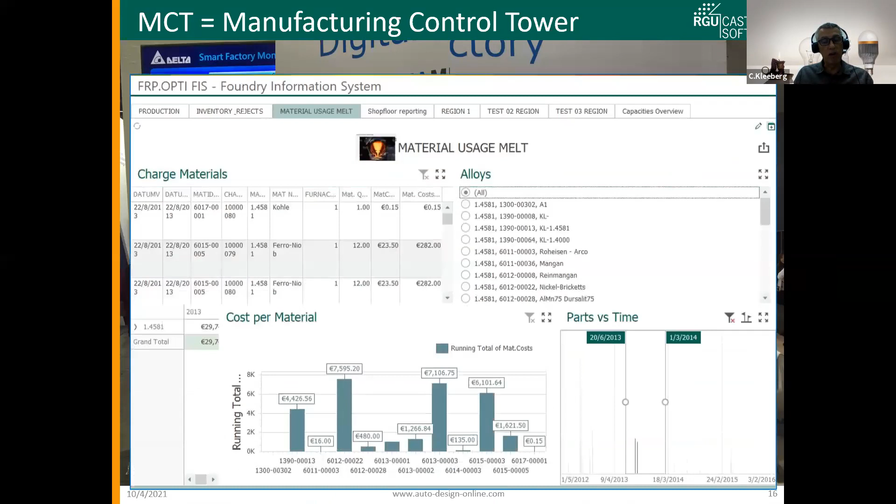Well, how does that apply to foundry? Actually, quite well, because in a foundry, when we talk about, for example, the melt shop—and I'll come back to that in a minute—we are talking about really understanding the costing of materials, the usage of melt, what parts have been produced in what time, how many charges have been done, and so on. So data in foundry is apparently a super important aspect in order to make the company smart.

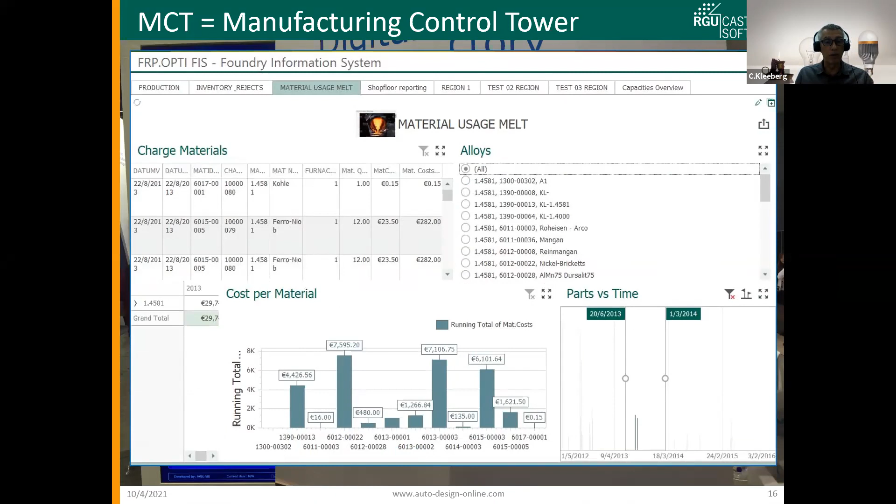How do we do that, and how do we start? Let me give you some examples. One example is sensoring. Endless opportunity—a machine, even an old one, you can put a sensor on it. The sensor will give you a digital signal in most cases. You can use that signal, for example, for on, off, has done the job, whatever it may be.

Sensoring is no rocket science, it's available. Older machinery can be upgraded. There's a lot of companies that work with this already, and they sell it as high tech. It's not really high tech actually, but this is something you should explore, because that's an area where you can capture data, for example, through sensors.

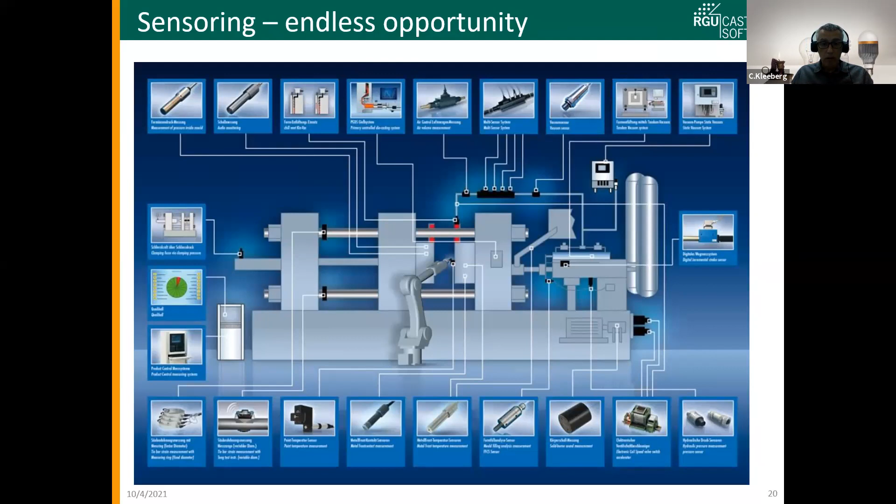One example also from Norican. Norican is the mother company of DISA, and DISA itself is also advertising strongly in digitalization areas, and they have a lot of sensoring already deployed. They have their own little software system as well that's just applicable for the DISA foundries, but it's an individual solution by itself. You can see already that foundries can have these technologies.

The foundries can capture the data. They are in a position to harvest it, and it's just that they have to do it. If they don't do it, well, then something else can happen.

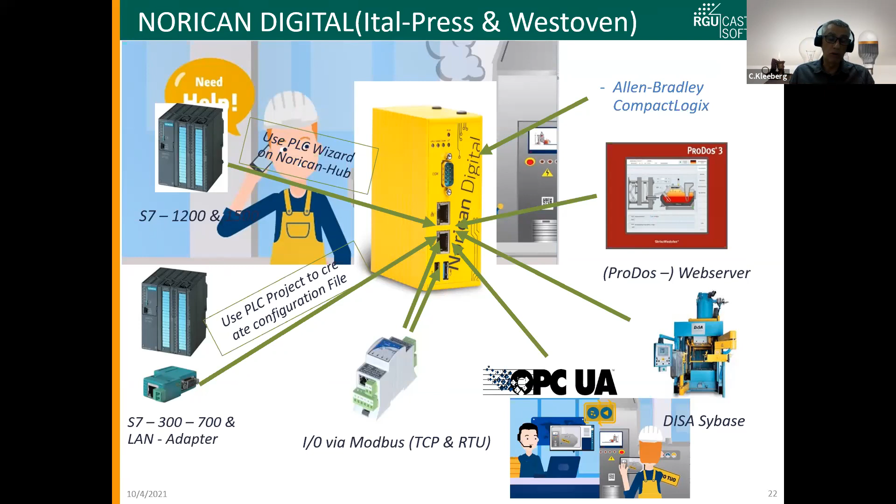In procurement, it's the same thing. Foundries can go digital in their procurement strategy. We just talked a second ago about raw material pricing. If you know how to handle your procurement strategy better through digital means, you can probably control your cost better. You cannot avoid material prices going up, but you can do better due diligence in understanding how your own costing will be. Apparently, most foundries don't do that, so again it's about understanding the benefits of going digital.

Another area where we talk about data is generally about how foundries perceive it. We know for many of the companies we've talked to, they are very strongly influenced by social media. We also know that in the last 2 years plus alone, we had a huge data explosion globally. Today, more than half of all commerce transactions are done through mobile. And what's important to highlight here is that, in many cases, the supply chain is still very old school, especially in foundry as well.

So we have to break that up, find ways to help them improve. So what do we do? What are the challenges? First of all, we have to get the mindset right. The mindset means we have to get rid of thinking that it requires a big budget, that only big companies can afford it. That's not correct. The mindset is also that we do not have the time and resources to do that.

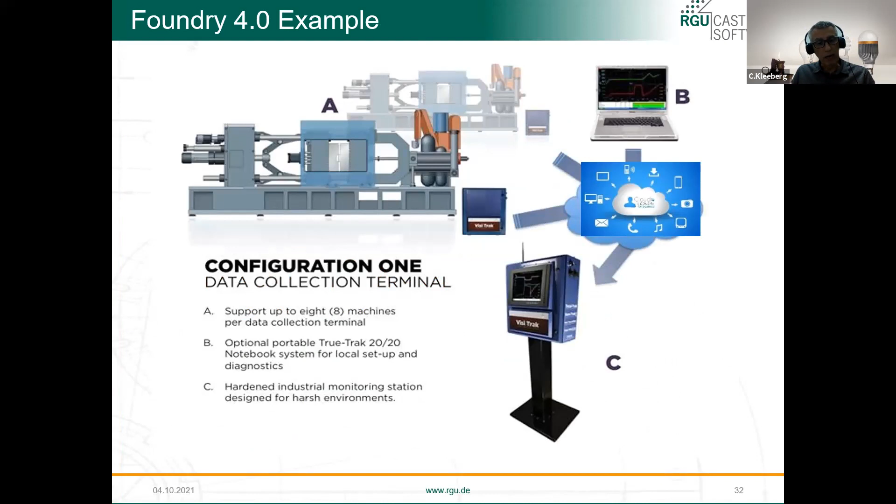Apparently, as an example, in die casting - also an area of concern - machines can be interactively connected through a terminal. Production data can be visualized in a complete new format. There is almost unlimited availability here.

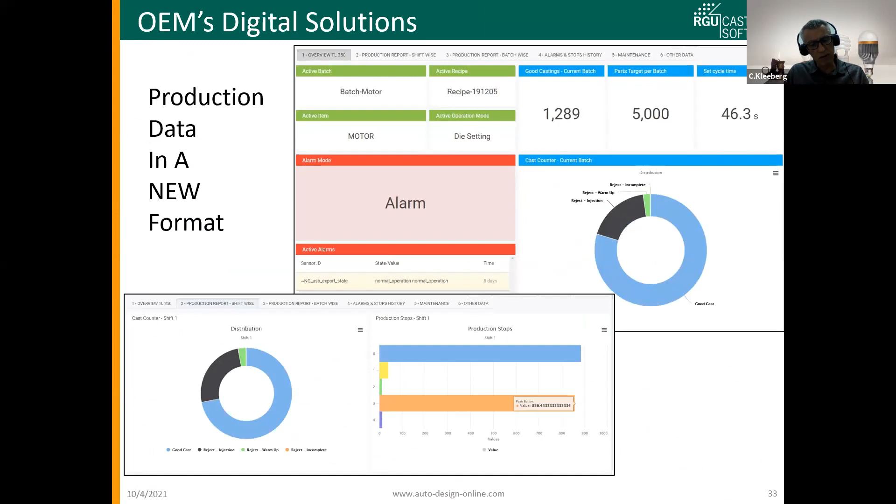And even the IIF, the Indian Institute of Foundrymen, asked: smart foundry, how? Key elements are process automation, the most challenging; machine automation, the most common, needs process integration; machine learning, very critical for Foundry 4.0; system integration, bringing all digital devices and data onto one platform. Ultimately, upskilling human resources is key to success.

So here we are very much in line with what the IIF also says, that foundries have to evolutionize.

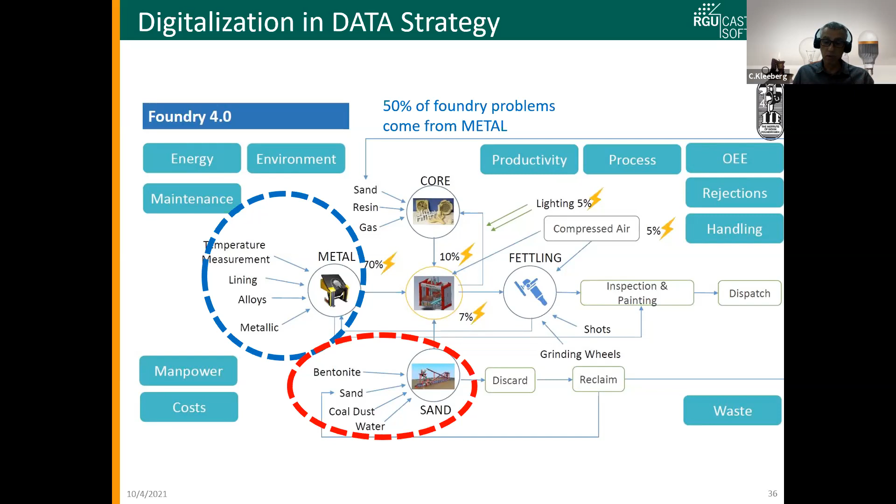Today, we talk about two major areas. We have on one side the metal side, and on the other side, the sand side. And I can frankly say 50% of foundry problems come from metal, and Deepak will highly likely agree with me, 50% of foundry problems come from sand. If you address 100% of these, it doesn't mean you have zero problems, no, but you may have better consistency.

And you can see already in this chart how complex it can become when we talk about Foundry data - how complex it can become getting the Foundry data in the right manner, through the right instrument, with the right tools, into the right platform, because you have to do something with the data, otherwise it's useless.

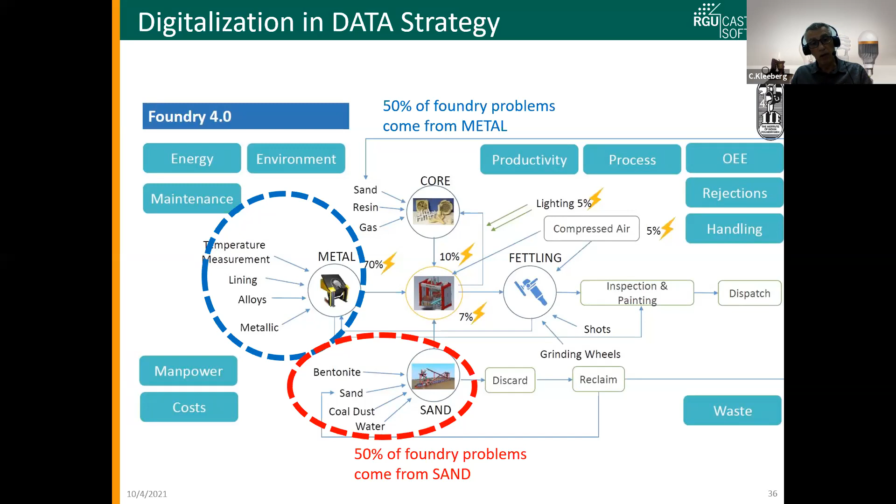Let me give you an example of what we mean when we say big data is equivalent to big money. We have in our own software systems one particular solution called FRP Melt. It's a digital melt shop control management system, way more than just a so-called charge calculation software. And it has already been used in many, many foundries globally, definitely also here in Asia Pacific.

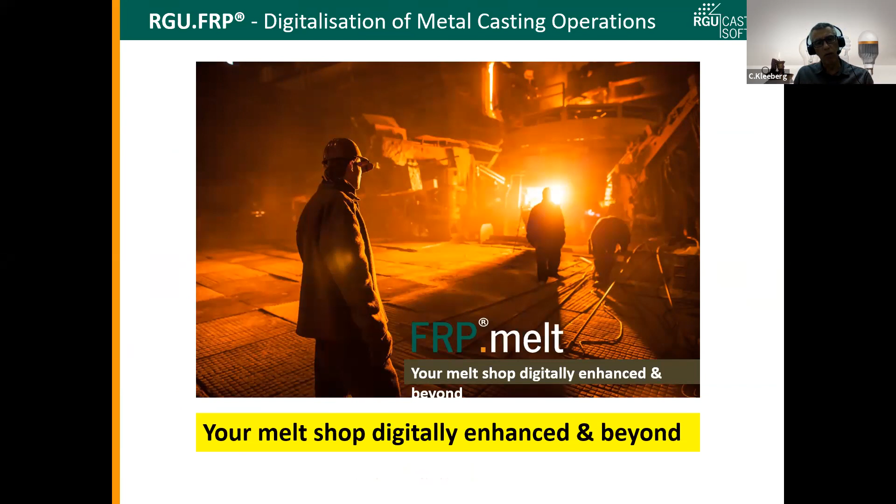Now let me give you an example here. When we talk about melting, how is an alloy de facto being made? We have charge materials, we have grade specifications, we have melting facilities, we have alloying material, we have charge calculation, we have chemical analysis. In fact, many recipes on how to make an alloy are very often a company secret.

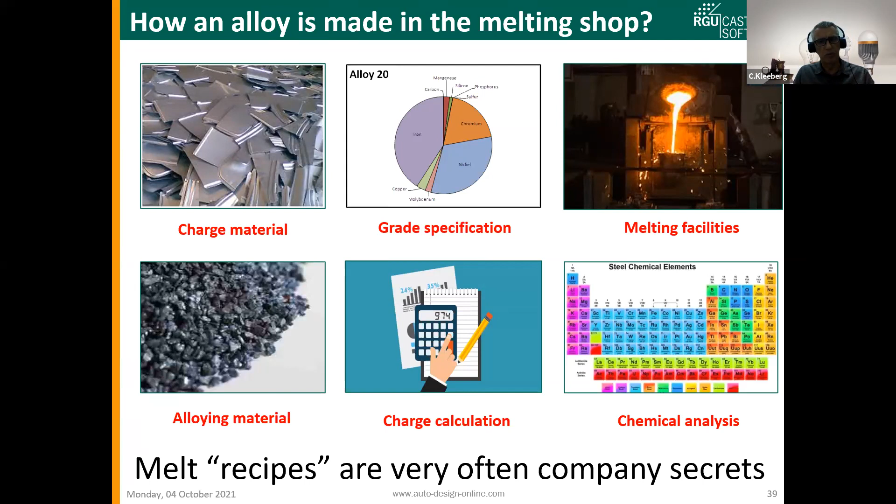Companies treat this quite secretly. But how do they manage the data behind that? That is something in many companies, unfortunately, still very old school. How do we want to do it? Apparently, we want to understand the composition, the batching, how we do melting and treatment, how we do the actual pouring and cooling, or how the cooling conditions are, even up to heat treatment.

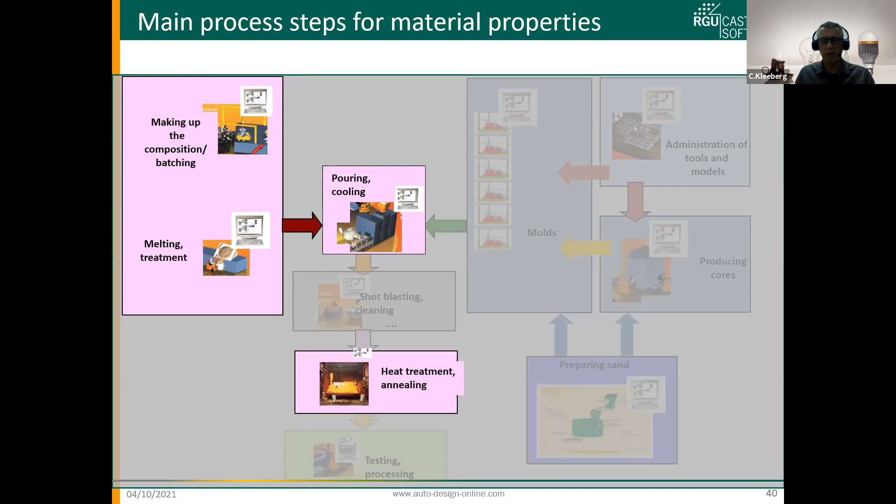So when we bring this know-how of how to make a melt into a database, apparently we have huge benefits available. Database means we are creating, as an example, a melt report where the composition is analyzed, where the materials being consumed are recorded, and even the power consumption per heat, per charge. Imagine you have not just one melt report, imagine maybe 1,000 melt reports in a month. This can be done very quickly. And this means automatically that you create a database of what you're actually doing.

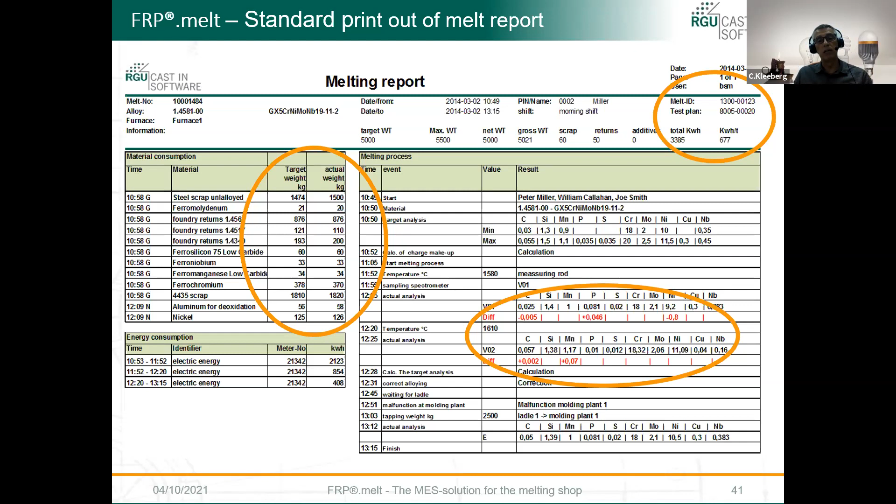And you can start making data-driven decisions. So we always ask our customers, why should we do this? What's the motivation going into the data field of a melt, which is very difficult? Well, apparently the melt shop, in our experience, is the least explored digital area. And that's why we say big data means big money, because what and where can I improve? I need the data for that.

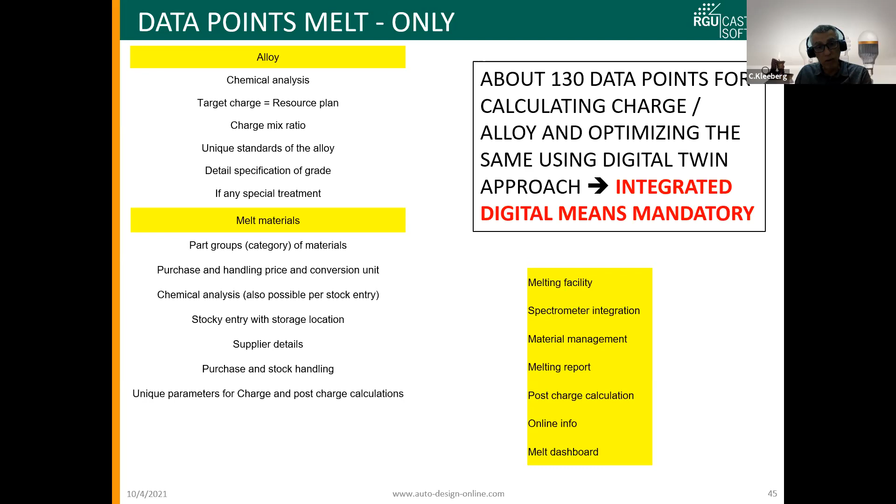Let me give you one example from our melt software. How many data points can we actually capture? I just took alloy and melt materials as an example. We also have melting facilities, spectrometer integration, material management, melting report, post-charge calculation, online info, melt dashboard. So on average, we have about 130 data points. Nobody can handle that if it's just on a piece of paper or in an Excel file. So we have to look into integrated digital means to make sure you benefit from that, and you do not throw away your data. No, you utilize it on a daily basis.

Having done so, huge benefits are available. Database means you can calculate the end result faster. You have time savings. You can better secure the melt quality. You have less material consumed. Ensure the melt recipe is preserved. Consistency is there. Of course, time is money in the melt shop. Every minute the furnace is not powered, time and energy are saved. So-called what-if scenarios can be done. Material properties can be improved. A lot of transparency and a lot of savings can be achieved.

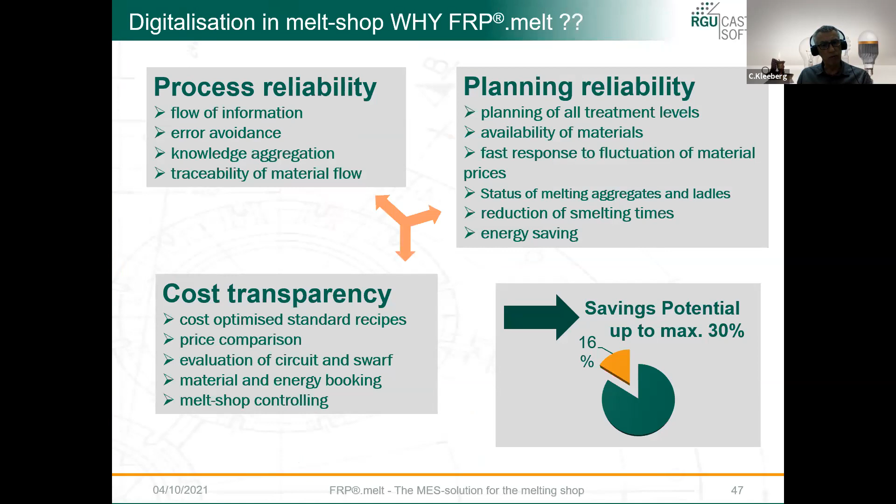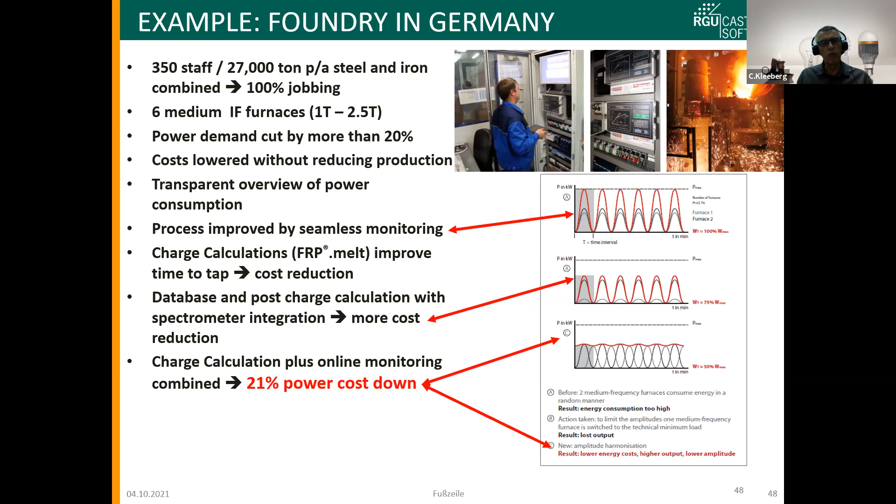A quick side note: process reliability, planning reliability, cost transparency - all this requires data, as I just said a minute ago. A small example from Germany - sorry, I don't have one from India right now - but this is a very interesting example where a foundry was able to reduce power costs by 21%, and they have that consistently done over the period of time. This is why we are focusing on melting and making sure our customers understand you need to capture that data for your own benefits.

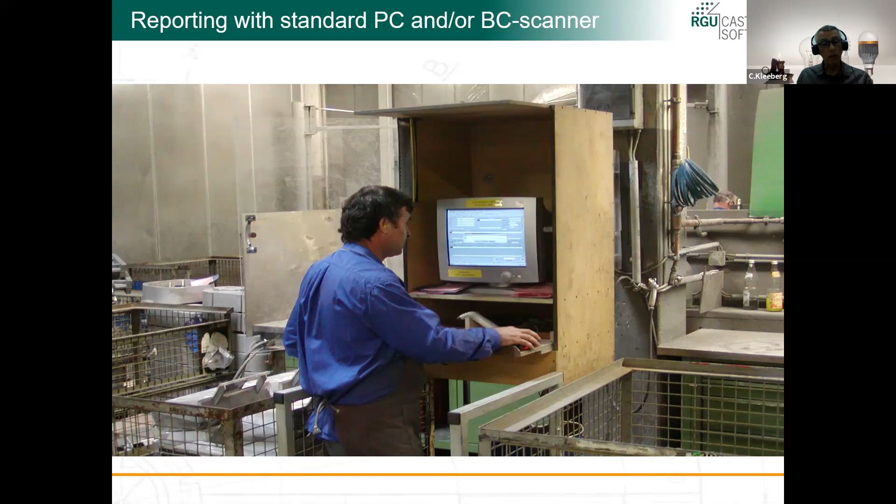Last but not least, how do we go to the next step? So when we have captured this data, we have a strategy, we know how to handle it, sensoring and many others - what do we do with it? This picture, as you can see here, is already, let me guess, 15 to 20 years old. Look at the monitor, old school monitor. But the worker is reporting directly to a computer, not on a piece of paper, not on a log card, not in an Excel file, straight into the system. Apparently, it's possible. And when we look into, for example, tool management as one example in foundry, we look into real-time status of a tool, a pattern.

Is it available? Is it blocked? Is it under repair? Is it due for maintenance? And so on and so forth. How many times have I an imprint?

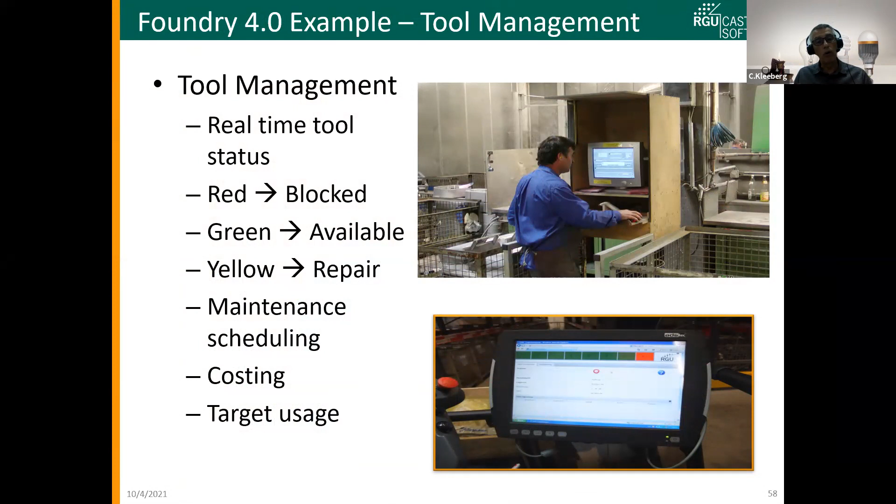All areas are available, so that's just a pattern management area. Or I look into the idea of tagging my cores with an RFID code, making sure all the core dryness data is captured, the corresponding mold info, so no mismatch of core and mold. All that done to avoid any problems at a later time with the casting itself.

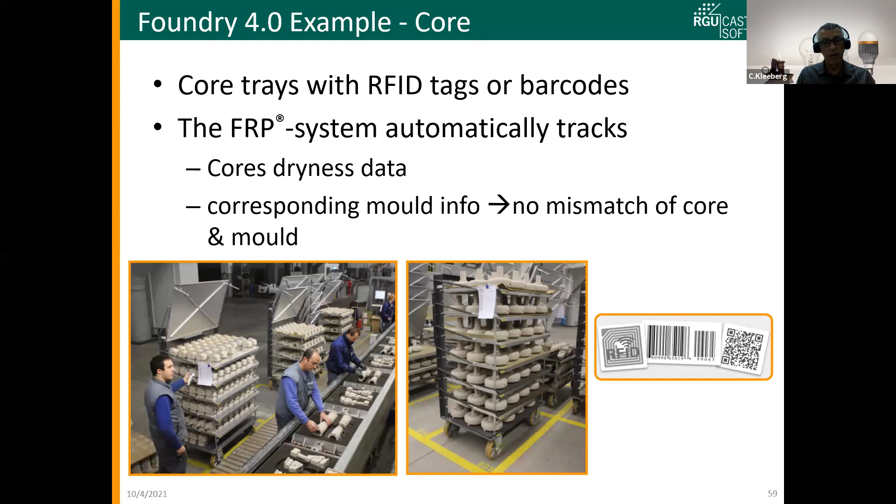Another example of data collection is in the planning department, knowing upfront: do I have enough capacity? Do I have enough resource loads? Or is my utilization right? So all these things can be done nowadays, all through the correct data capturing in Foundry.

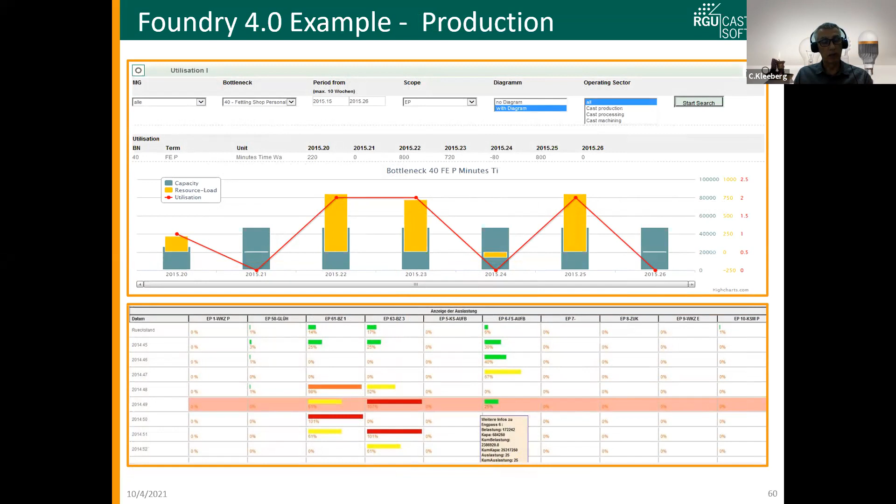Ultimately all will end up in dashboards, all typical kinds of visualization of data. I think you're all aware of that, but who has a dashboard at the entrance of the factory showing the company's KPIs on the spot in real time? I haven't seen any Foundry yet, but I hope I will see one very, very soon.

And if I can predict that in the future, or I can say if in the next 6 months my material prices go up by a certain percentage, I have to revise my pricing to my customer. Again, this data is invaluable, and I must say it's probably the biggest asset you can have in order to manage your own costing and to stay above the bottom line.

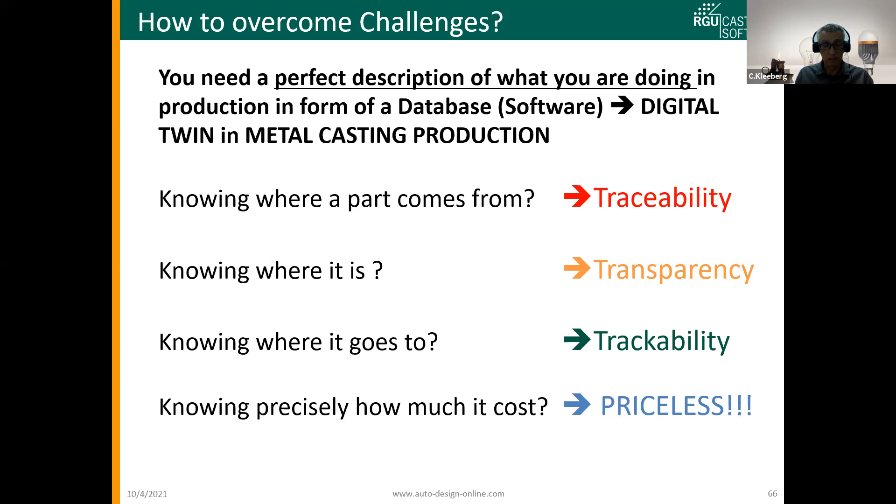We want to know where a part comes from, traceability. We want to know where it is, transparency. We want to know where it goes to, trackability. And ultimately, you want to know precisely, and I repeat the word precisely, how much it costs. That's priceless. So for this and many, many more, you need what we call a digital twin approach.

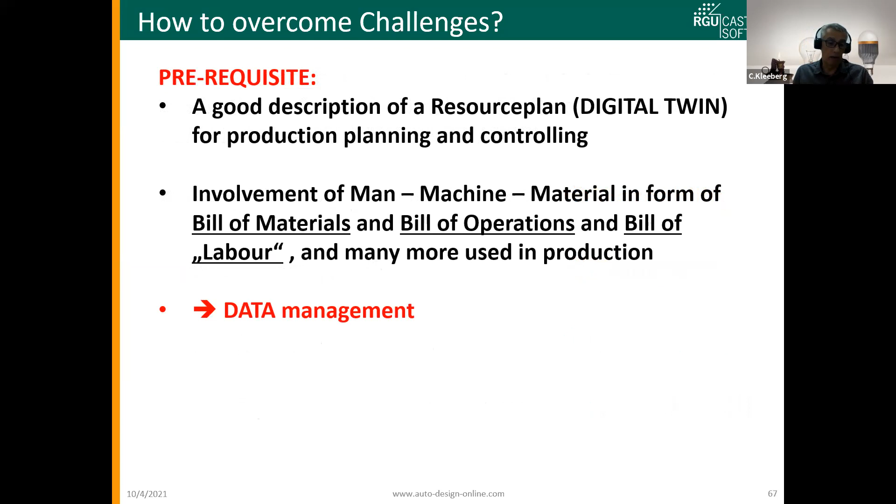A digital twin is nothing more than using data management. And as I mentioned before, look into planning, it requires data. Software supplies data. This is how fast you can go.

We are closing the loop now by giving you 3 steps to make sure you embark on your data strategy, that you understand clearly, okay, these are the steps I need to take for my company, and these are the areas I need to look out for in the near future.

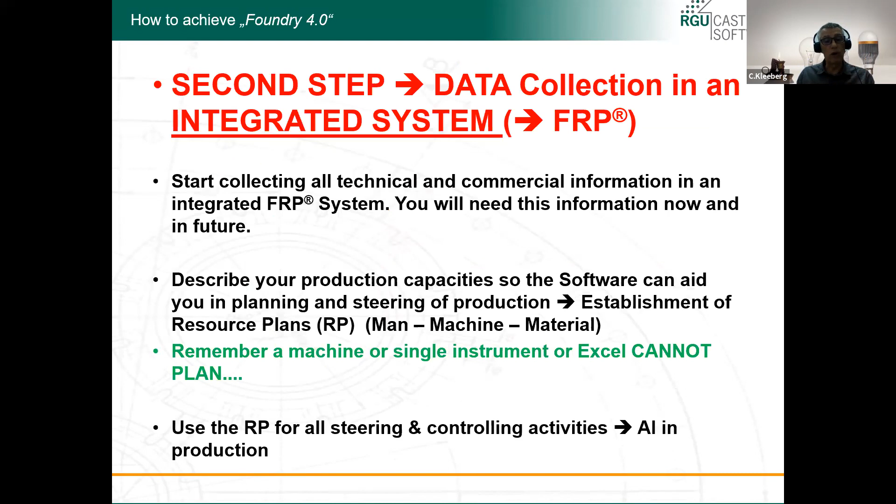First of all, I need to look into data collection in an integrated system. Hopefully something like what we have to offer, but not necessarily. I have to make sure everything comes in the right way. I have to make sure I describe the data correctly, and I have to make sure to understand that Excel cannot plan. And I need artificial intelligence through, for example, a digital twin.

Another area, I need to invest in HR. Do not forget that. A lot of foundries think, I deploy, I don't need to train. No, it's the other way around. I need to train and then I need to deploy.

So it's very, very important that, again, intelligent machines are a single solution, standalone. They cannot do planning, and then they cannot steer the whole production data. Barcoding, QR coding, laser marking, these are just entries, but it requires the human behind them.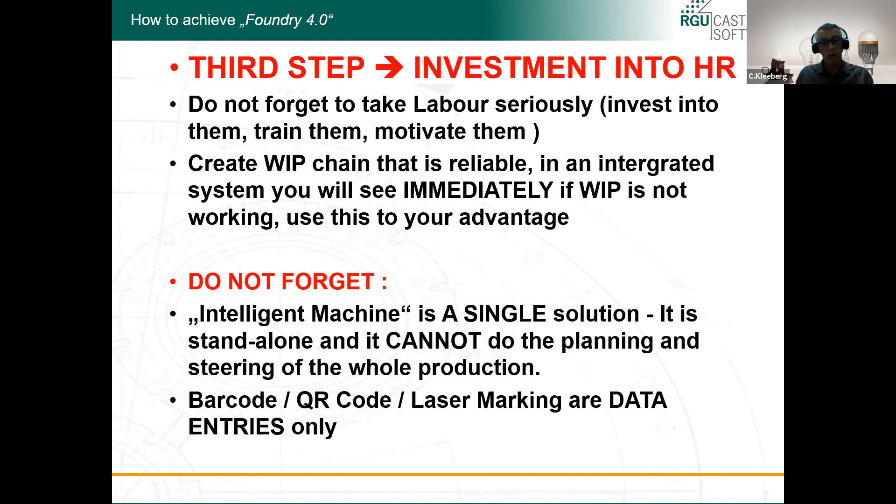Really important is, of course, let's not forget the investment into HR. The biggest question is, of course, how much does it cost to do all that? Our answer is, you have seen already our 10 examples or 10 steps on how to embark at your leisure. The answer is actually very simple. It's not a question of how much it costs. It's about, can I afford not to do it?

Foundries that are still not going down the digital pathway and not addressing their biggest asset, their production and manufacturing data, are the foundries which may not survive in the future. We will have to see that.

So for us, it's clear: foundries, hopefully everywhere, but especially in India, should move away from being the dirty, dangerous, and difficult ones. They should go towards the digital, dynamic, and data-driven ones, because they have a lot of treasures on the shop floor.

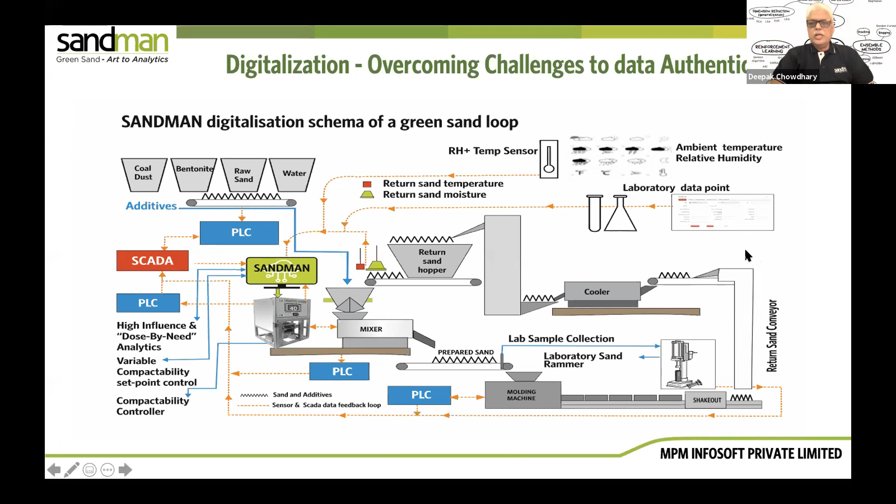How we can take this data into the SCADA is a story which I will talk to you about in a case study as we go into the subsequent slides.

Now, I want to share with you what normally people, when they talk about data or data analytics, really do not emphasize. Number one, the question we need to ask is, do we really have meaningful and authentic data? From my experience in Foundries, even today, meaningful and authentic data is missing. So what we really need is to find ways how we can have it accurate, authenticated, and we have to validate whether that data has been authenticated and is accurate.

Now, there is a different degree of variability in different parameters. So the data capturing frequency - if I say I've got this machine, that machine, these 3 machines, and all are generating data, and then we have a laboratory, right? So one machine is generating data every 2 minutes, one machine is generating every 1 hour, another machine every 6 hours, and the laboratory is generating once a day. So we have got to understand what is the frequency of this data capturing, because that determines the variability of the kind of data that you are going to get.

And that is important for the next step - that the data captured from varying sources needs to be aligned. So if you have a mixer generating data every 2 minutes, and you're testing compactability every 1 hour, you've got to ensure that your 1 hour compactability test is equal to the closest point at which the last mixer data was generated. Then you have to even calibrate your sensors periodically, and you have to select the right approach for the data gathering facility, data gathering process, SOP.

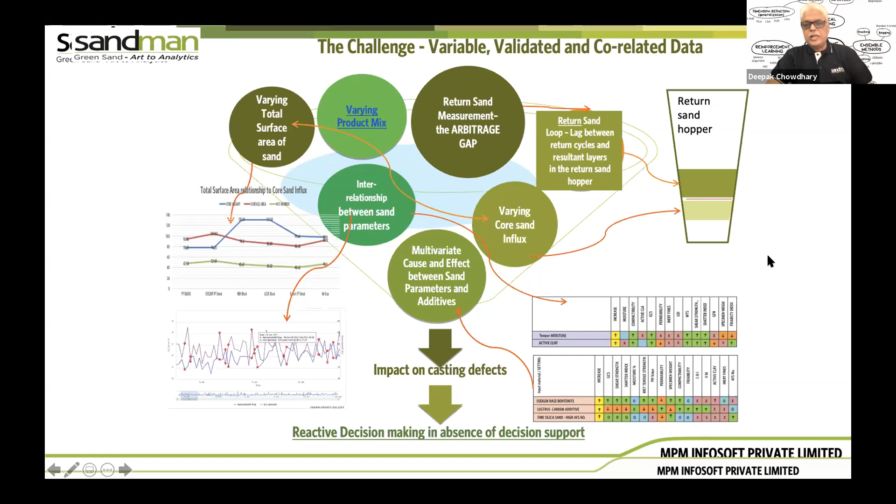This is an example only - there's a full matrix, but I wanted to give you a snapshot that out of the 20 tests we do, if you change the temper water of the sand, it immediately impacts about 6 properties of the sand. If you change active clay, it changes 7 or 8 other properties. This shows that every property is multivariably interrelated to the others being tested, so you have a really complex cause and effect interrelationship, which is not possible to control on a symptomatic linear cause and effect basis.

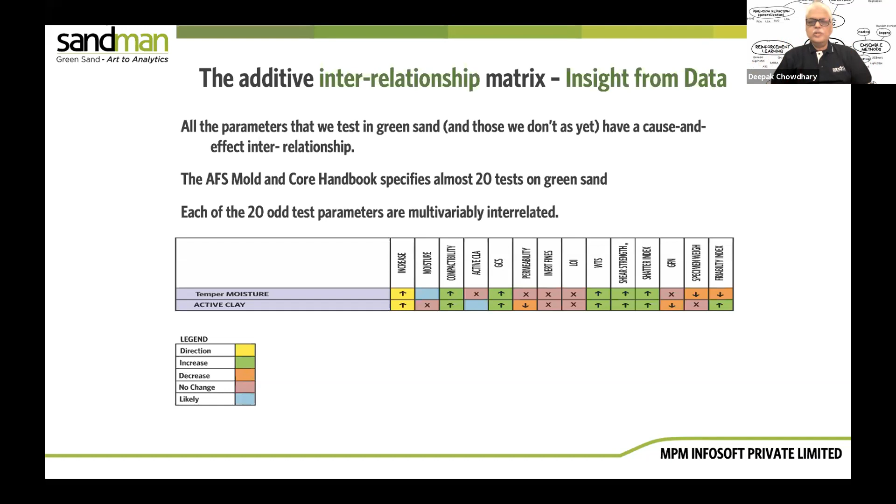When I said actionable insight is crucial, let me give you an example of even simple analytics from what we developed in the Sandman DigiSmart model, a smaller model of the digital twin of a foundry, and how it can give you simple insights. Foundries that don't want very complex analytics but would like simple analytics can ask: what is my correlation between rejections and parameters? You have rejections in these columns and sand parameters on the left. Taking an example of negative correlation with compactability - as compactability increases, sand fusion will reduce. Similarly, moisture has a direct correlation with rejection, so if you reduce moisture, rejections will reduce.

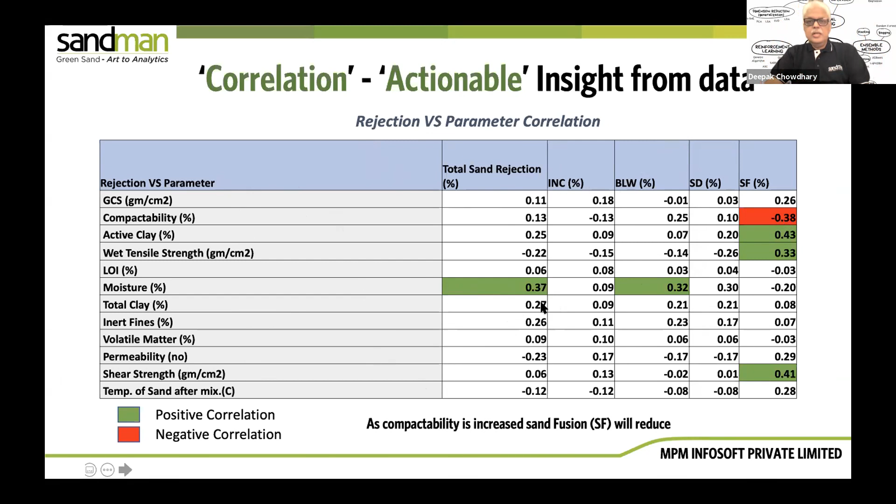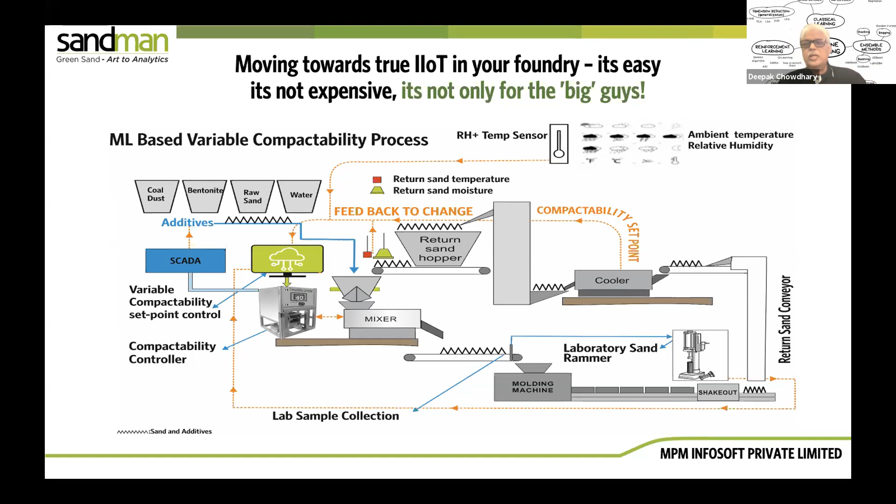If you see it today and recognize it - and I'm not saying it for everybody, but I'm telling you - most foundrymen agree that their variations can be in the range of ±5. If we are able to reduce that ±5 to ±2, because now we have data-based decision support based on sensors, we are in a very good place.

This is what we do. This is a patented algorithm by MPM Infosoft known as VComp SP. So we take foundry data from the compactability controller - set point, discharge compactability. We take prepared sand data, lab compactability, and sensor data of humidity, ambient temperature, return sand moisture, return sand temperature. This analytics you may or may not want, it's up to you, but we can use this data, align it, put it into a predictive and optimized algorithm, and we can predict the compactability set point, which will be variable.

Now, I'm not trying to sell the product. I'm just trying to sell the idea that if we want to have green sand molds of very good integrity in order to prevent expansion defects, maintain the integrity of casting dimensions, avoid wastage of our metal, prevent fusion issues, and prevent the lack of control on moisture, we can tap into this data source and do what we need to do.